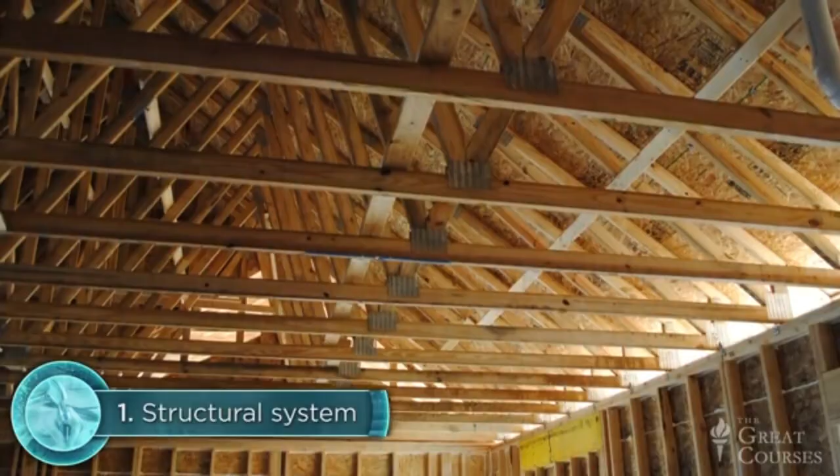The structural system supports the weight of the building itself, the weight of snow and ice on the roof, the occasionally severe environmental loads caused by wind and possibly even earthquakes, and the weight of people and their accumulated stuff—furniture, appliances, clothing, books, pots and pans, you name it.

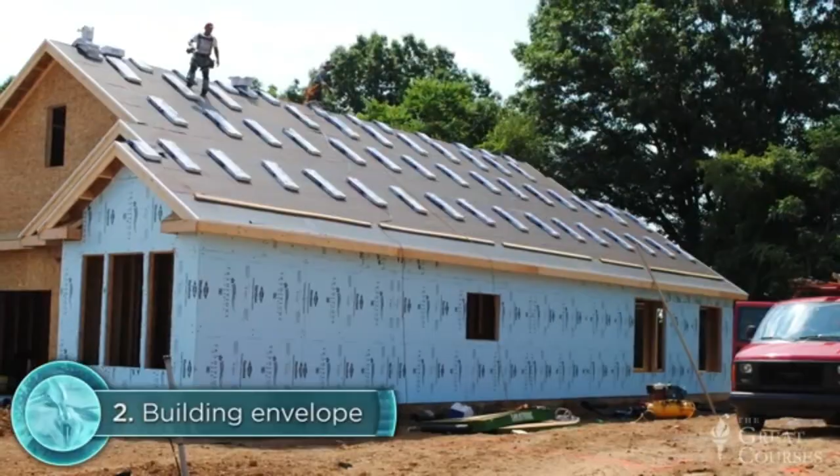The building envelope is a highly specialized set of building components that keeps the elements out and helps maintain an appropriate range of temperature and humidity inside, while also allowing for access, egress, and natural illumination.

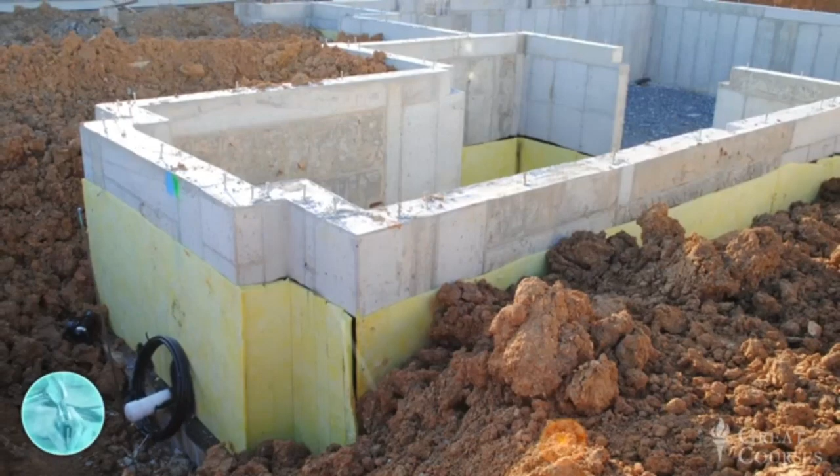The foundation is, in one sense, part of the structural system because it transmits the weight of the building and other loads safely down into the earth, but it also serves as a critically important component of the building envelope, protecting the home from groundwater infiltration and heat loss, and sometimes enclosing additional living or utility space as well.

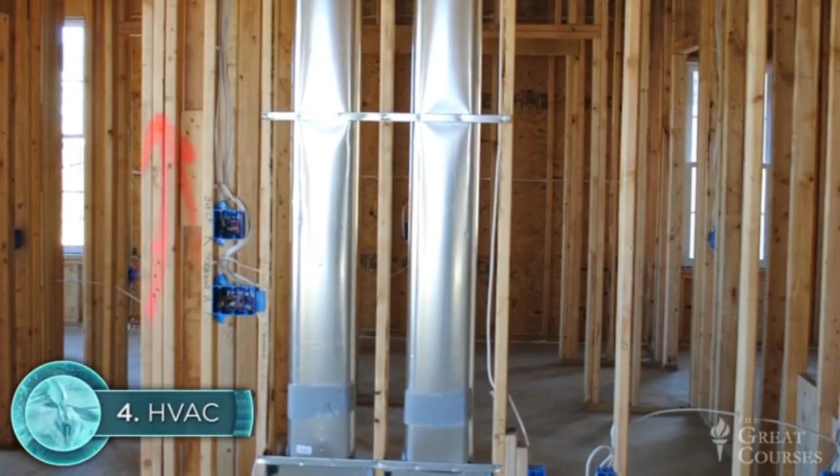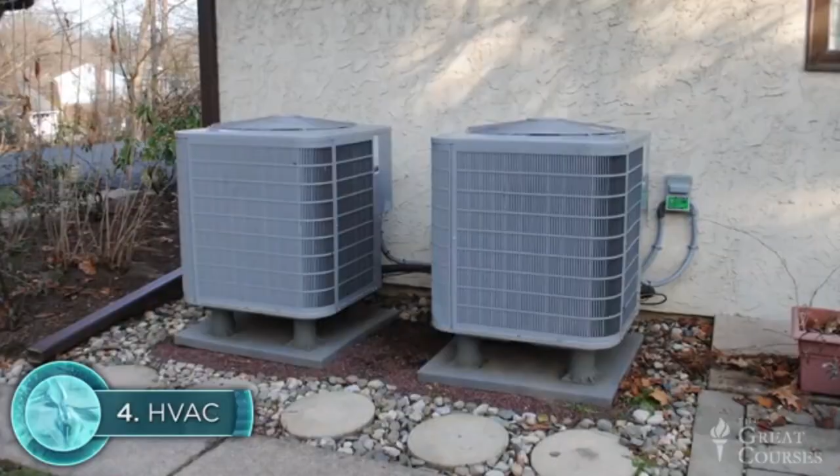The heating, ventilating, and air conditioning system, abbreviated HVAC, provides control of temperature and humidity while also supplying fresh air. The electrical system provides power to outlets, light fixtures, appliances, air conditioning, perhaps heating, and various control systems like the thermostats that control both your HVAC system and your hot water heating.

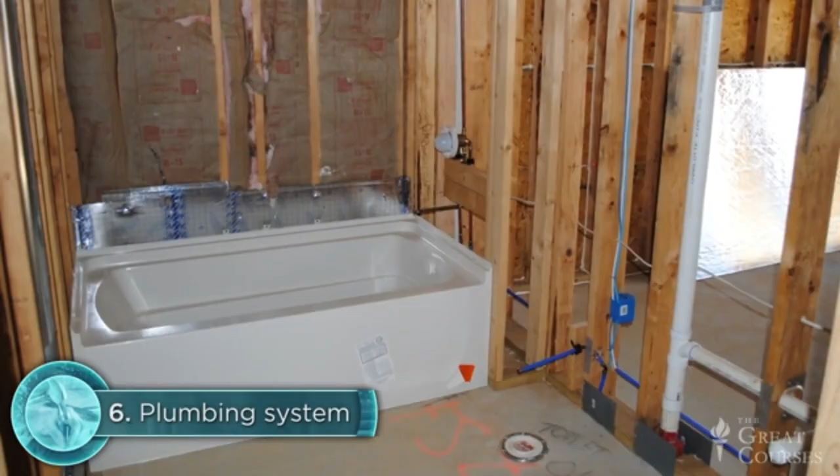The plumbing system delivers fresh water under pressure to various fixtures throughout the building, and removes wastewater from these same fixtures. The telecommunications system includes phone, cable, and wireless links that enable the transmission of information to and from the outside world.

Until recently, your home's built-in telecommunications might have included nothing more than a telephone line and perhaps a cable TV hookup, and could hardly have been characterized as a system. But today, with the advent of in-home computer networks, satellite TV, internet-enabled climate control, and who knows what next, the private residence has truly become a telecommunications hub.

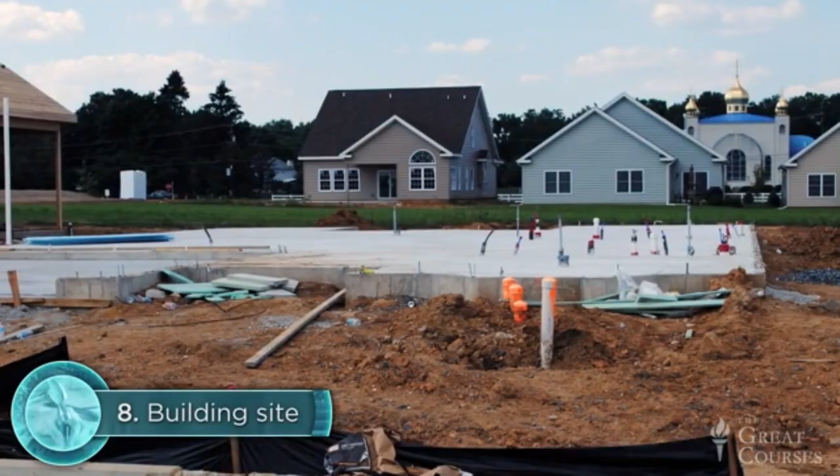Finally, a vital yet often overlooked subsystem is your building site, the plot of land on which your home is situated. The building site provides structural support for your foundation. It controls the flow of storm water across the site. It connects your residence to the local road network via your driveway and to public utilities via curbside connections.

We'll look at each of these subsystems in considerably greater detail in future lectures. But for now, it's most important to see them from the macro perspective as highly integrated components of a far greater whole.

Now, when I say that these building subsystems must be integrated, I'm actually referring to 3 distinctly different aspects of residential design and construction. First, those 8 subsystems—structural, building envelope, foundation, HVAC, electrical, plumbing, telecommunications, and site—must work with each other. Second, they must work within the context of a broader architectural design. Third, they must be integrated within large-scale civil infrastructure systems.

Let's consider each of these three forms of design integration in greater detail. First, subsystems must be integrated with each other. The 8 building subsystems are highly interdependent. Consider a few common examples.

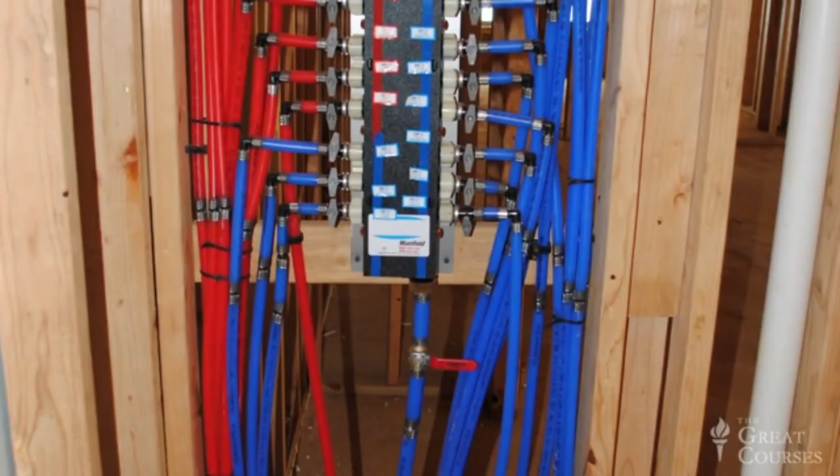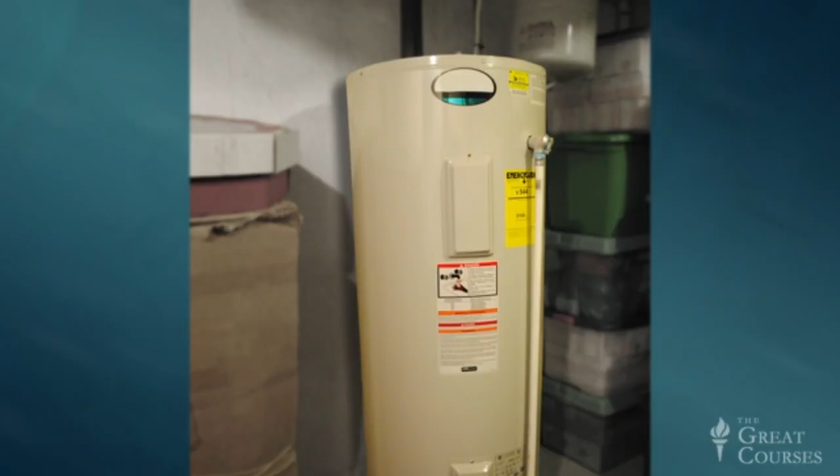Your water supply lines, wastewater pipes, electrical wires, telecommunication cables, and air conditioning ducts must all pass through structural wall framing and floor framing without adversely affecting their load carrying capacity. In this photo, we see water supply lines and wastewater pipes integrated within the structural framing of a typical house. Your plumbing system depends on your electrical system, which powers the hot water heater and the garbage disposer.

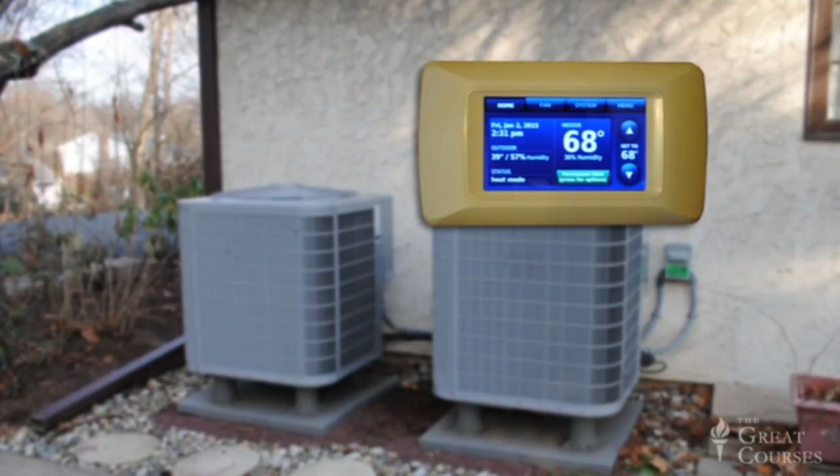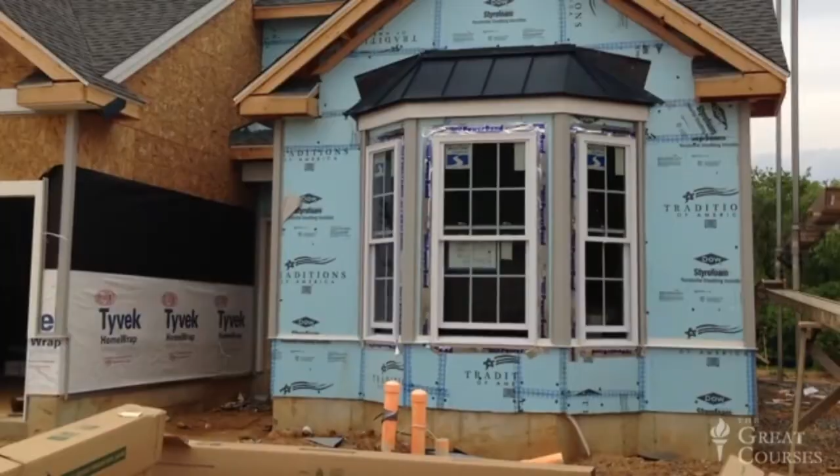If you heat your home with water circulated through baseboards, then your heating system depends on your plumbing system for its water supply. Your heating and air conditioning systems also depend on your electrical system, even if you heat with oil or natural gas, because the electrical system powers the thermostats, fans, and compressors that the other systems require. The effectiveness of your heating and air conditioning system is also highly dependent on certain characteristics of the building envelope: its air tightness, the amount and type of insulation, the sizes and types of windows and doors.

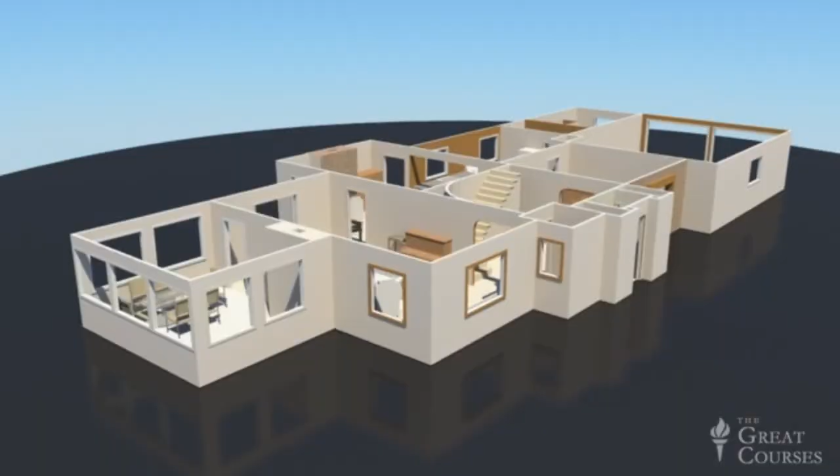Now, the second form of design integration is that the 8 subsystems must work within the context of an overarching architectural design. Typical elements of an architectural design for a residential building include the allocation of interior space to various rooms and functions, defining how large each room should be, and access and circulation, defining how occupants will enter, exit, and move around within the home.

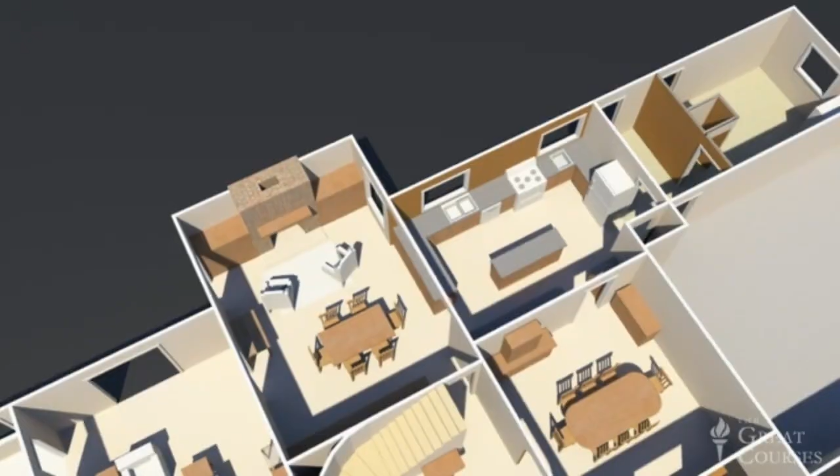Adjacencies, defining which rooms should be close together and which should be far apart. Fenestration, defining the sizes and locations of windows. The locations of major appliances and fixtures. And of course, aesthetics, which includes the house's overall style and form, its position on the building site, and its exterior and interior materials, finishes, and details.

Now, from the perspective of the typical home buyer, all of these architectural elements are probably more important than any of the engineered subsystems. This is the case, at least in part, because the engineered systems are largely hidden from view, out of sight, out of mind. But also because we tend to assume that these systems are well designed and working properly unless we see clear evidence to the contrary. For these reasons, home buying decisions are far more likely to be made on the basis of architectural rather than engineering criteria.

And consequently, the underlying engineering design of any building, private or commercial, is almost always subordinate to the architectural design. The engineered subsystems must accommodate the spatial and aesthetic demands posed by the architecture, not the other way around.

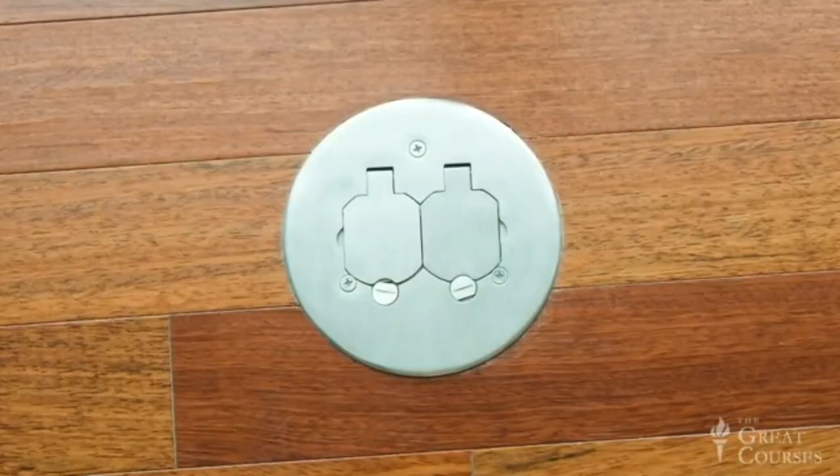For example, if the architectural design calls for an open floor plan with few interior partition walls, as you see here, the structural design may need to provide for unusually long-spanning beams to support the ceilings, and the electrical system might include a lot of floor-mounted outlets. If the architectural design calls for an exterior wall of glass, the structural, heating, and building envelope systems will have to accommodate the unique demands associated with this architectural feature.

Third form of design integration. Unless you're living in a log cabin in the wilderness, your house is embedded within a large, complex network of civil infrastructure. Now, the term infrastructure refers to large-scale technological structures and systems that enhance societal functions, facilitate economic development, and enhance quality of life.

The most important elements of civil infrastructure are transportation, electrical power, water supply, wastewater disposal, stormwater management, and telecommunications. As you can probably see, each of these major infrastructure networks has one or more interfaces with the engineered subsystems of your house. Our civil infrastructure is a technological system of systems, the scope and complexity of which is nothing short of mind-boggling. Yet we must devote the time and energy necessary to understand it, because the everyday engineering we experience inside our homes would simply be impossible without it.

To help us wrap our brains around the civil infrastructure, I'd like to try depicting it graphically, albeit in greatly simplified diagrammatic form. There are many possible variations in this diagram, depending on, for example, whether your residence is a single-family home or an apartment in a high-rise tower, whether your heating system is an oil-fired furnace or an electric heat pump, whether your wastewater is discharged into a public sewer system or an on-site septic tank.

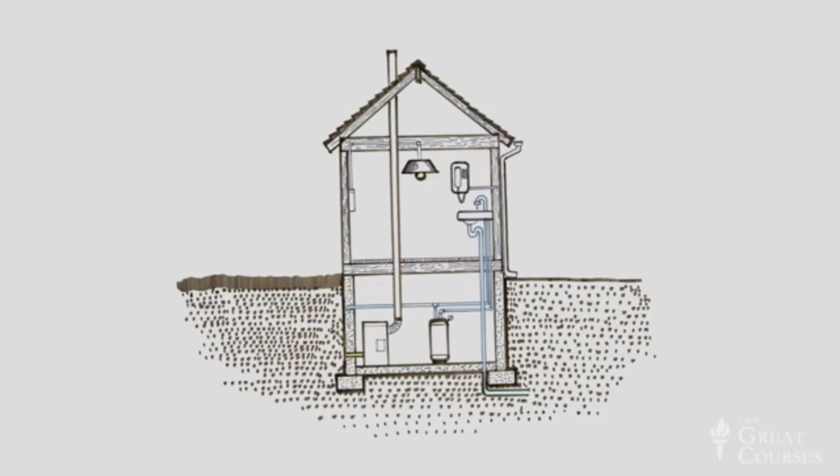Here's my house with its structural system, foundation, building envelope, and site. And inside, its HVAC, electrical, plumbing, and telecommunications subsystems. My house has 8 major connections to local and regional infrastructure. Let's examine each one. First connection is electrical power, which serves as input to my electrical system.

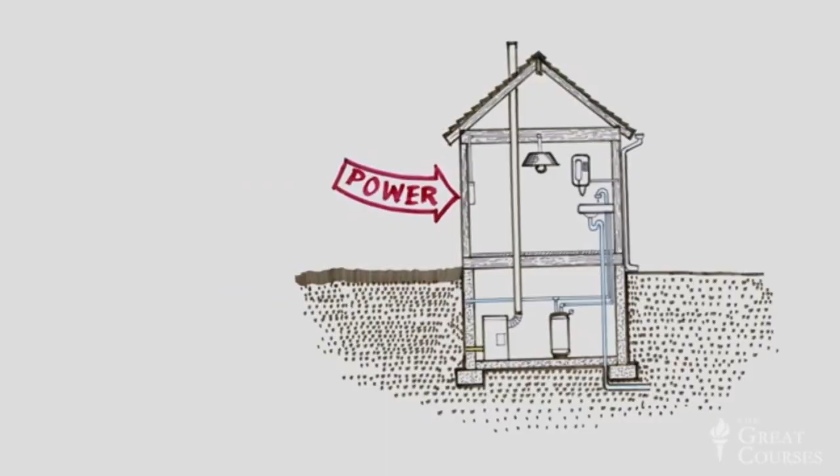My power comes from several different sources, but for the sake of simplicity, I'll depict just one, the largest contributor: the chemical energy of coal. Vast quantities of this material are extracted from the earth at a coal mine.

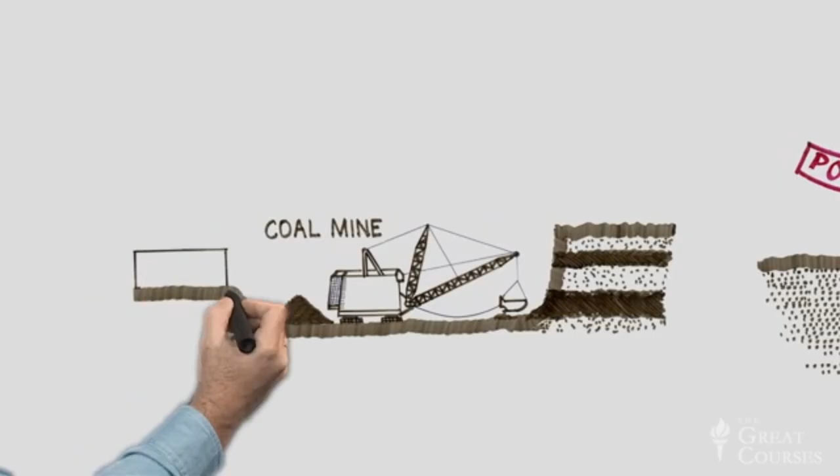The coal is cleaned and sorted at a processing facility, then loaded onto a freight railroad for transport across an extensive track network to a coal-fired power plant.

This facility burns coal to produce steam that drives a series of turbines, which spin the generators that produce electric power. This electricity is then fed into an extensive regional power grid.

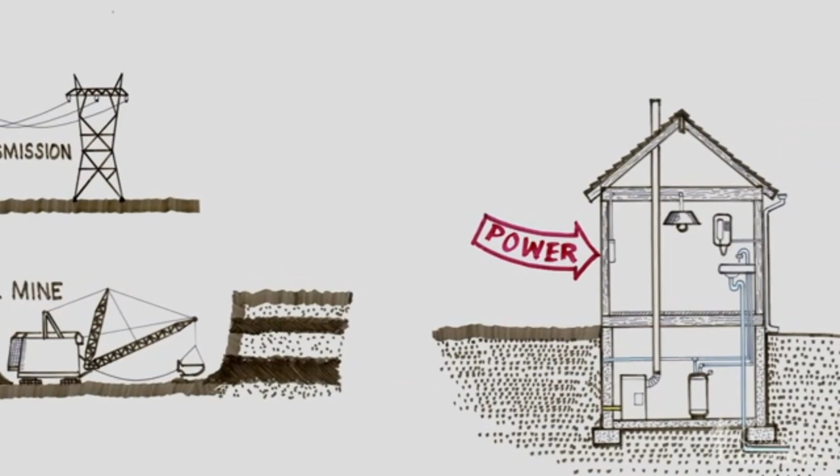This grid consists of a vast network of high-voltage transmission lines which can move power efficiently over long distances, substations which lower the voltage to safer levels for transmission over the last few miles to my house, and low-voltage distribution lines supported on the wooden power poles that are such a dominant feature of our modern landscape.

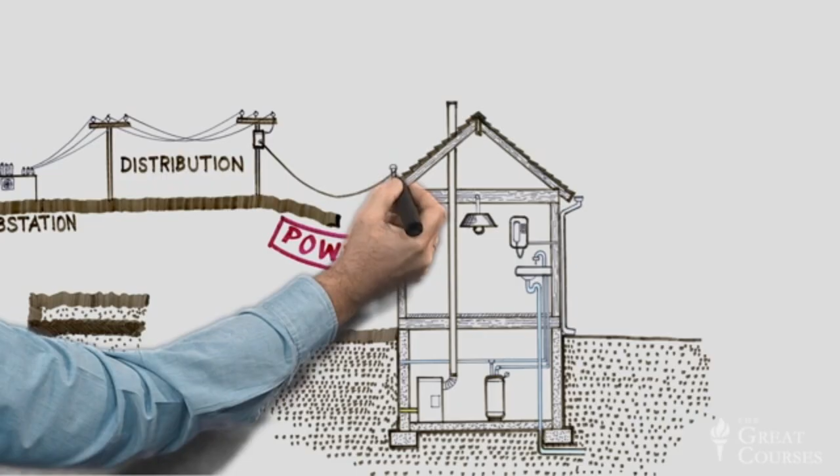This brings us back to my house, where a single line called a service drop supplies me with both 120 volt and 240 volt power.

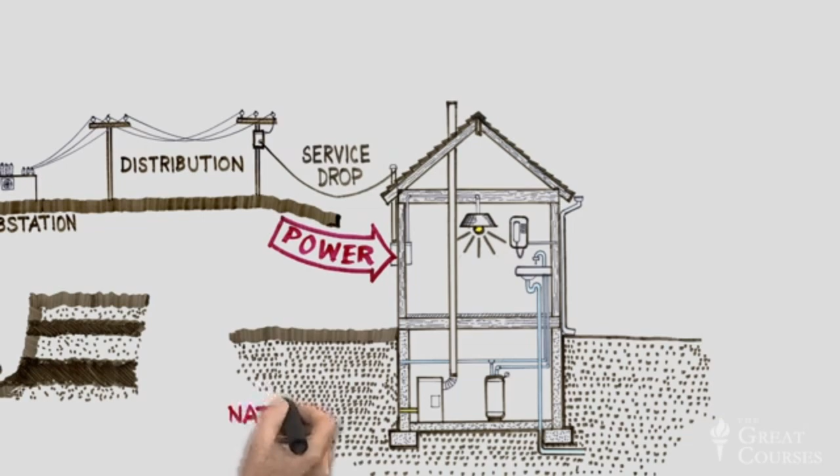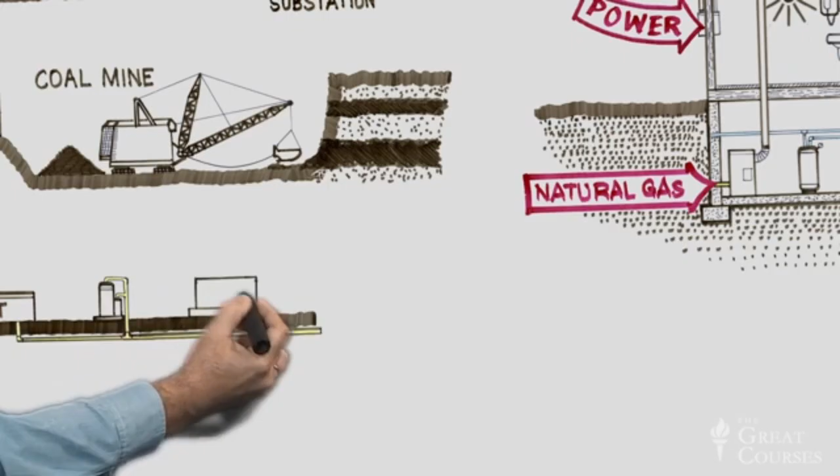And what about the natural gas that fuels my furnace and my hot water heater, not to mention many power plants? It originates in an underground deposit that's tapped by a drilling rig, then extracted from a well, piped to a gas processing plant where it's cleaned and refined, and then sent through a complex transmission and distribution system consisting of compressor stations, gates, and pipe networks to commercial and residential customers like me.

My third infrastructure connection is fresh water, which supplies my plumbing system. This resource originates in a local reservoir created by building an earth dam across the stream.

Water is drawn from this reservoir, purified in the adjacent water treatment plant, and then pumped into a storage tower located on a hilltop at the edge of town.

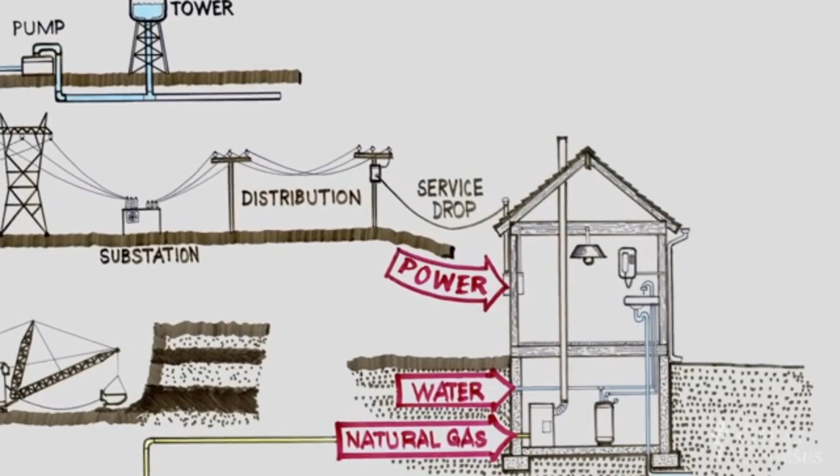From the tower, water mains loop through my neighborhood, and a single supply line extends from one of these mains into my basement. Most of the fresh water that enters my home through this supply line eventually leaves as wastewater.

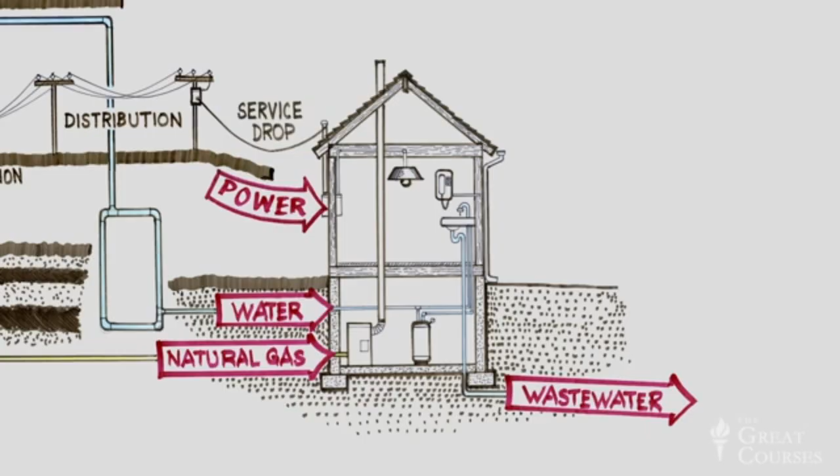Every household fixture that supplies water also has a means of collecting wastewater and channeling it through my plumbing system into the local municipal sanitary sewer system.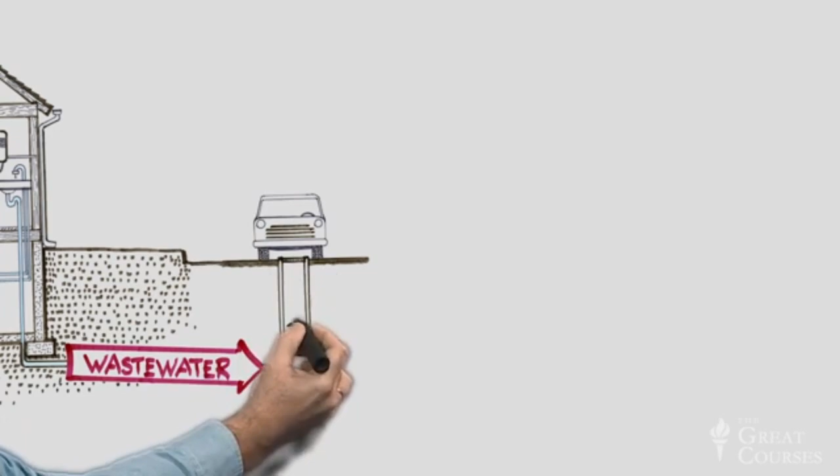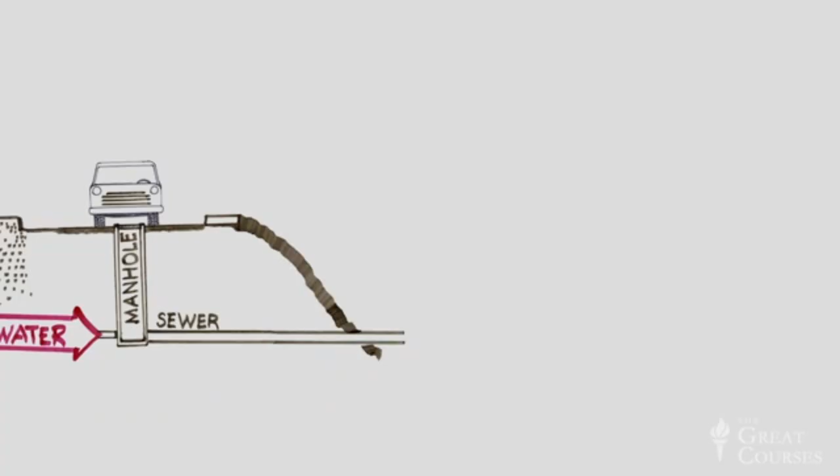The only evidence of this system I can see is that manhole cover in the street at the bottom of my driveway. But beneath the street, an extensive network of concrete sewer pipes collects and carries the wastewater on a gradual downhill slope to my local wastewater treatment plant, which purifies the water in a complex 3-stage process and then returns it to a local stream.

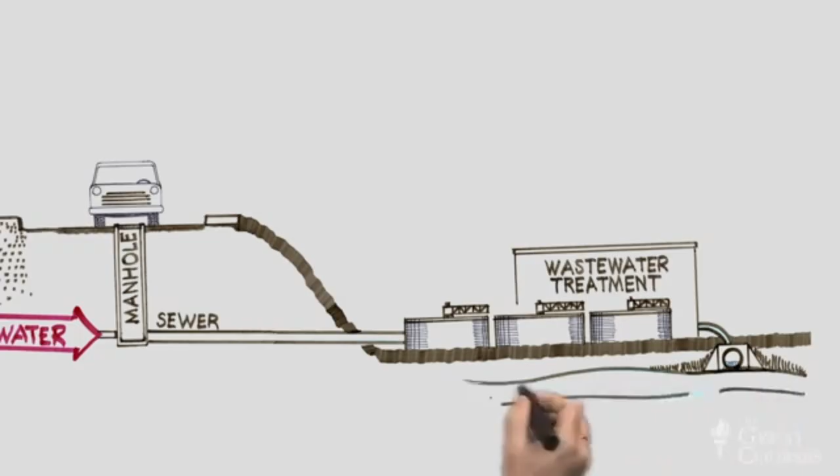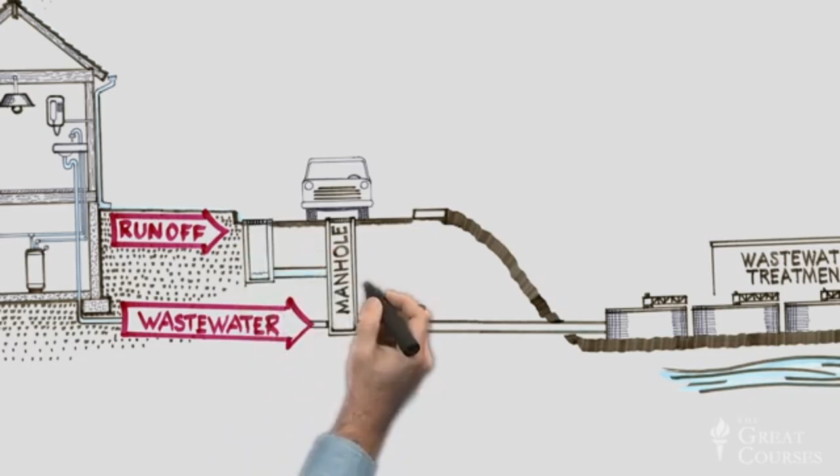The other form of water infrastructure that supports my home is the one that kicks in whenever it rains. This precipitation is directed off my roof, captured by my gutters and downspouts, and deposited in my yard and driveway as storm runoff. This flow of water is guided by the contours of my yard and driveway down to the street, where it enters the municipal storm drainage system.

This system captures and transmits storm runoff and melted snow through an underground pipe network into a local stream.

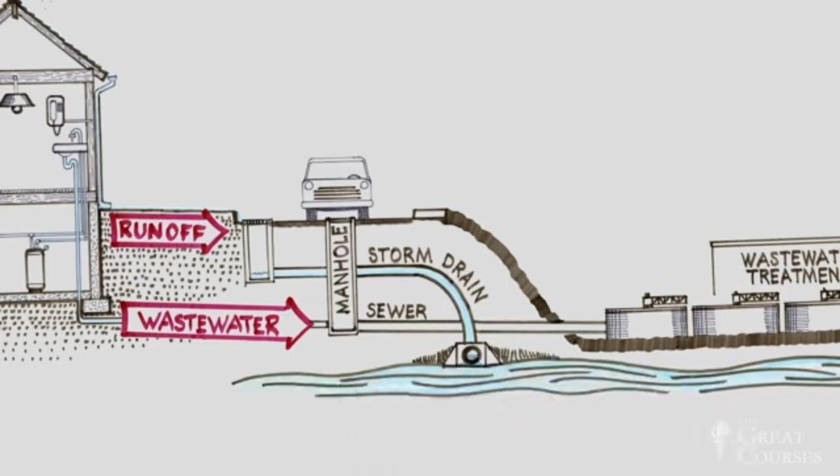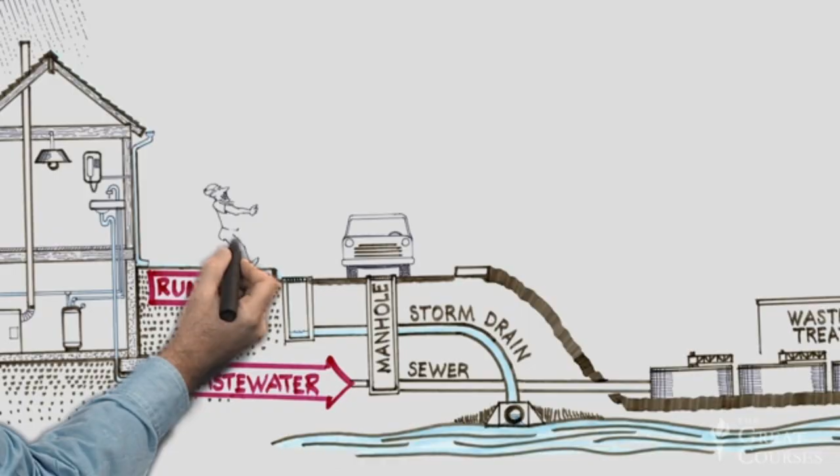The other infrastructure system designed to get undesirable stuff out of my house begins with me, carrying bins of food waste, milk cartons, packaging, aluminum cans, glass bottles, newspapers, and who knows what else down to the curb.

Here, the solid waste, often imprecisely characterized as garbage, is loaded into trucks and hauled either to a local landfill, where it's returned to the earth in an environmentally responsible manner, or to my municipal recycling center, where it's processed for reuse.

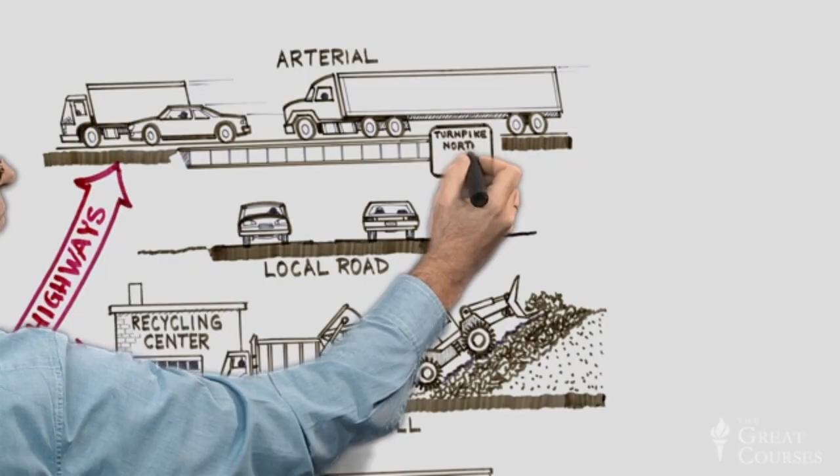My driveway also connects my home to a vast highway infrastructure, ranging from local roads to major limited access highways called arterials that facilitate long distance travel. This system also incorporates an incredible variety of bridges, intersections, and traffic control technologies designed to keep traffic flowing smoothly while minimizing the probability of crashes.

Finally, telecommunications. I'm a low-tech guy, so my house's sole built-in telecom link to the outside world is a simple landline telephone.

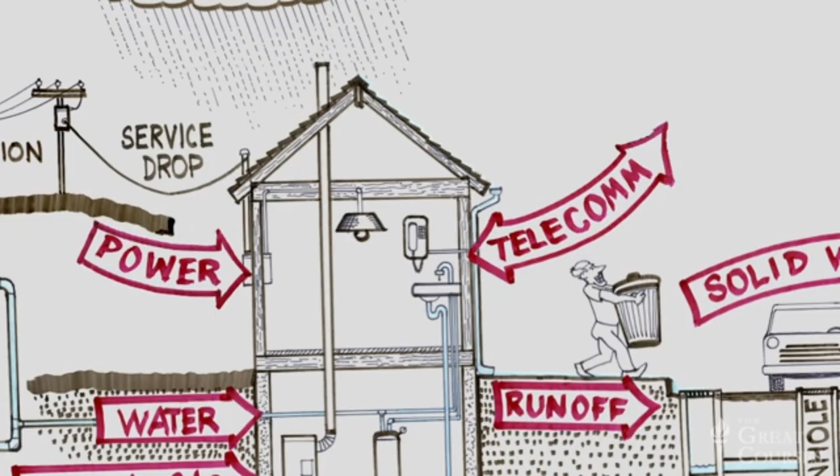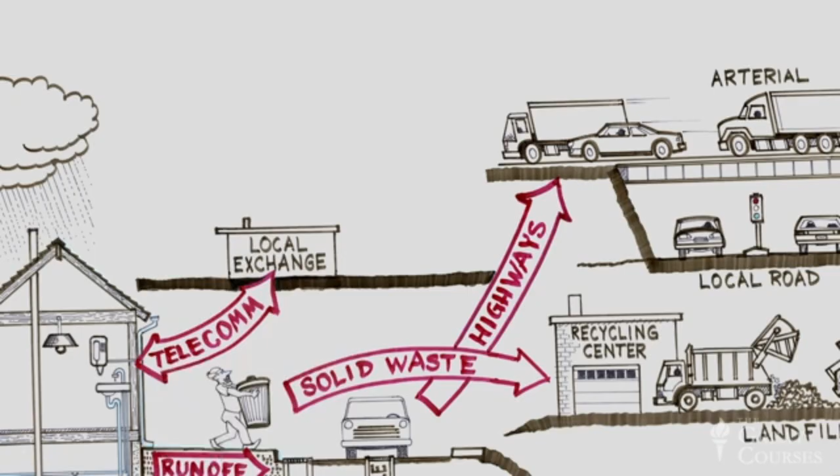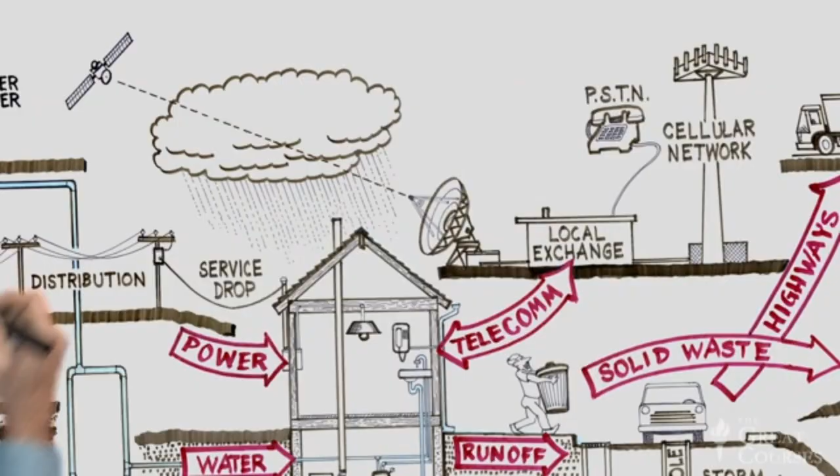Simple, yes, but through its interface with my local telephone exchange, this modest pair of twisted copper wires can connect me to any landline phone on the planet through the Public Switched Telephone Network, or PSTN, or with any cell phone on the planet through an interface with a satellite in orbit. And through my digital subscriber line, or DSL service, the same twisted pair can simultaneously transmit digital information to and from the farthest reaches of the internet. If ever there was an underappreciated piece of everyday engineering, this is it.

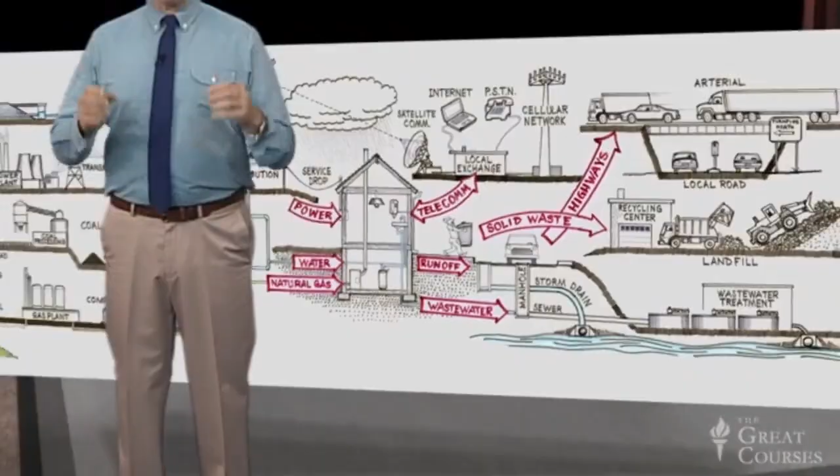These connections to our civil infrastructure are absolutely integral to everyday engineering, and so we'll be examining all of them in greater detail throughout the course. For now, I think it's important just to appreciate the overall character of this amazing system of systems, its extraordinary scope and complexity, its interconnectedness, the diversity of technologies contained within it, and its dynamic, ever-changing nature. And at the heart of this amazing system is my house and yours.

But how is this technological marvel realized? How is a residential building designed such that its subsystems are integrated with each other and with this complex web of civil infrastructure systems? Perhaps surprisingly, the answer is not that an engineer does it. In the US, individual private homes are usually designed by developers or builders, sometimes by architects, but hardly ever by engineers. So how could this complex technological entity that I've been describing as an engineered system not be designed by engineers? I can answer that question in two simple words: building codes.

A building code is a set of rules specifying minimum standards for construction. Its principal purpose is to protect public health, safety, and welfare, though modern codes also promote such secondary concerns as economy, constructability, and sustainability.

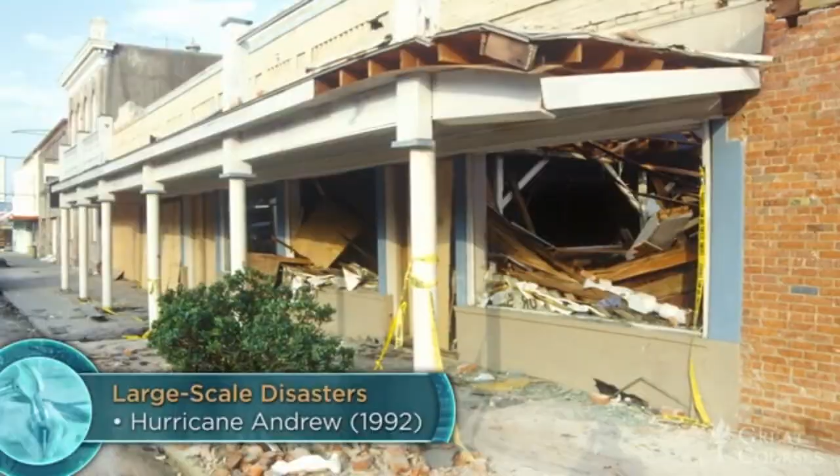The 20th century saw three important trends in the development of building codes. First, as engineering knowledge expanded at an ever-increasing rate, the associated codes became ever larger, ever more complex, and ever more prescriptive. With each new building failure or new research finding, code provisions were added to address the underlying issue. At the same time, building codes became increasingly balkanized, with wide variations in standards across regions, cities, and municipalities.

In part to address these problems, responsibility for code writing in the US gradually passed from governments to nonprofit professional societies called standards organizations, which could claim national or international scope while also commanding the high-level technical expertise necessary to develop codes reflecting current best practices. And because these standards organizations had and still have no legislative authority, they instituted that system of model codes that remains in use today.

Now, a model code, in essence, is the consensus recommendation of the professional community represented by a particular standards organization. For example, the American Concrete Institute publishes a model code governing the design of concrete buildings. But that model code has no legal status, and it's not enforceable unless it's formally adopted by a government entity, typically a state, county, or municipality, through legislation.